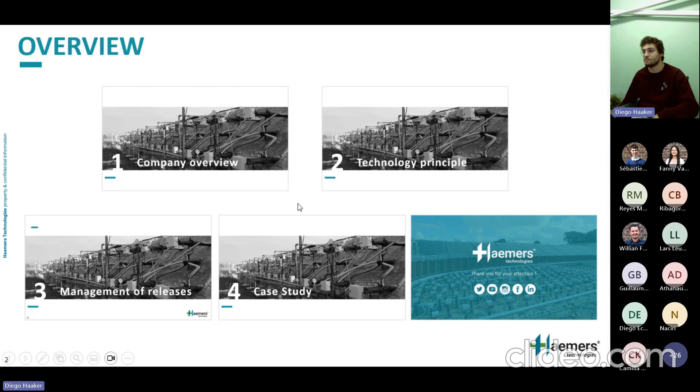So let's begin with the company overview. Who is Haemers Technologies? Haemers Technologies is a technology provider. We provide technology for soil depollution. We are based in Brussels, Belgium. We are approximately 40 people.

We have worldwide operations, and we have our own smart burners manufacturing facility. It's been 25 years that we've been in business. We also have our own lab and R&D facility. So to remind you, we are really a technology provider — that's the core of our business.

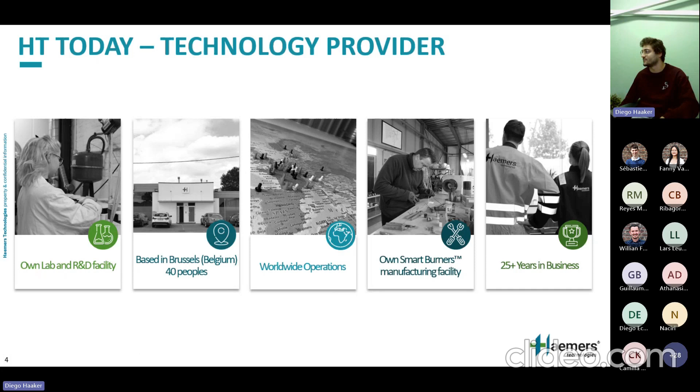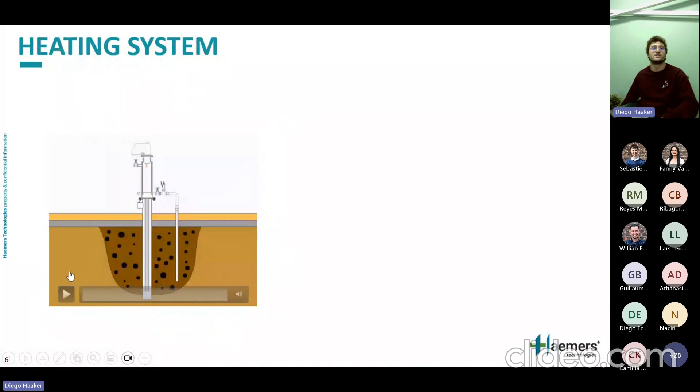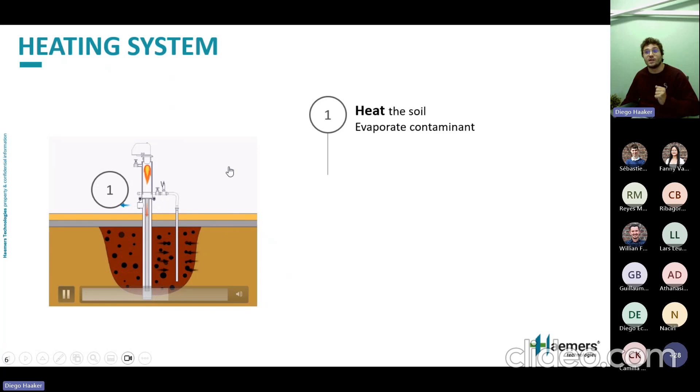Now let's take a look at the principle of our technology. We have a little animation here. Basically, what we do is heat the soil. Why do we heat the soil? We heat the soil to evaporate the contaminant, as you see here with the little dots. And why do we heat the soil to evaporate the contaminant? To recover all the pollutants. You see here that the pollutants are recovered by a tube, the vapor tube.

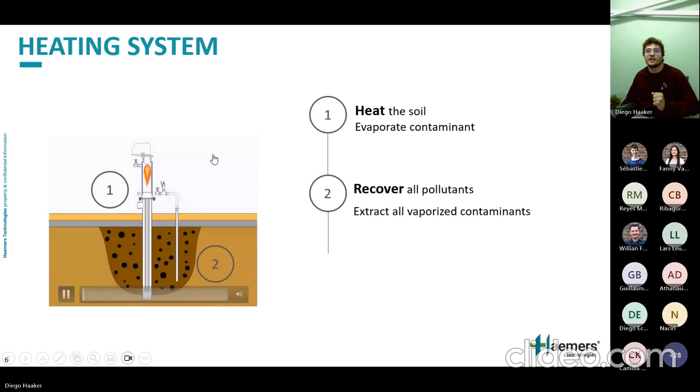And when the vapor is recovered, it is treated. In this example, the treatment method is the reburn. So the contaminant goes inside the burner, and we use it as fuel, so it's a clean procedure.

We also have another procedure to treat contaminants, which is the vapor treatment unit. It will be shown in the next slide.

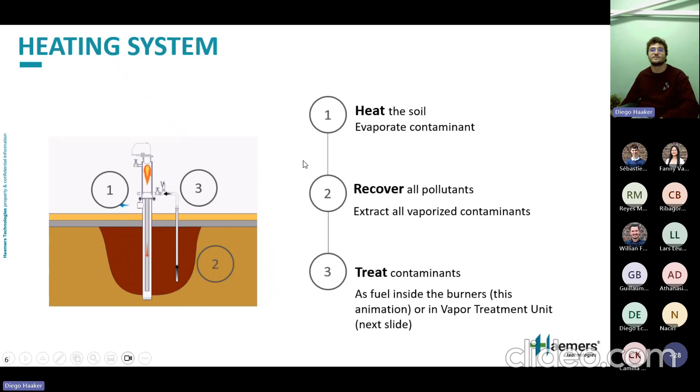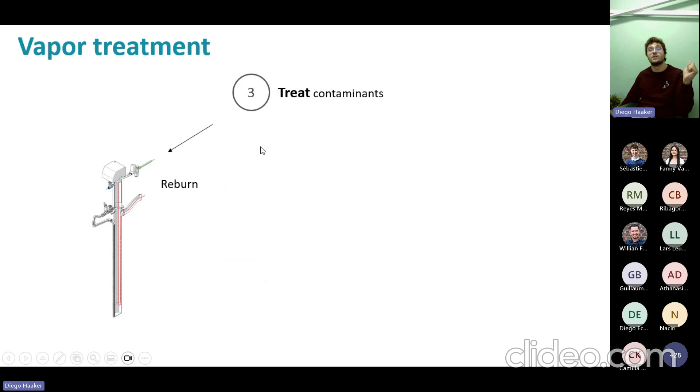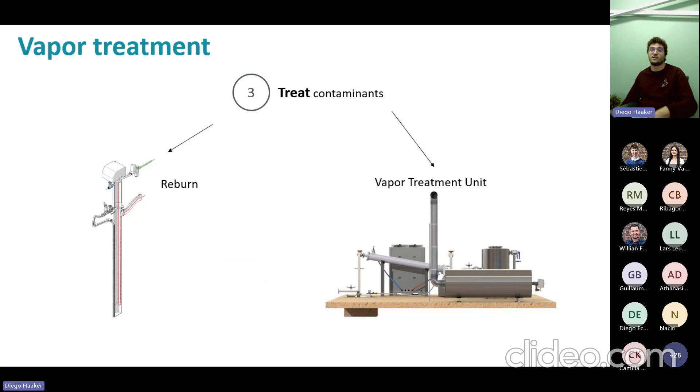As said, we have to treat contaminants, and we have two solutions. We have the reburn that was shown in the previous animation, where you have the vapor that goes inside the burner, or we have a vapor treatment unit. A vapor treatment unit is a lot of equipment whose purpose is to clean the vapor. I will show you more precisely that later.

So let's take a closer look at the reburn, because it's important to clarify these points to understand properly the heart of my presentation after. So you have the vapor that is re-injected into the burner. You see the vapor tube just beside what we call the heating tube, and these vapors go inside the burner. Then what we call the combustion gas goes into what we call the combustion network.

So combustion products are sent up to the chimney and directly destroy contaminants. What's interesting with the reburn methodology is that it reduces fuel consumption and it has a zero waste profile, circularity.

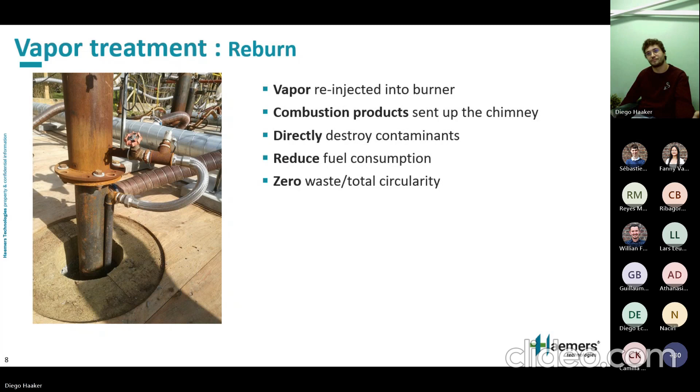About the vapor treatment unit, it's another scheme. It will again be more detailed after. So just another look at what it can look like for the vapor treatment unit - big equipment, and we will clarify this again later.

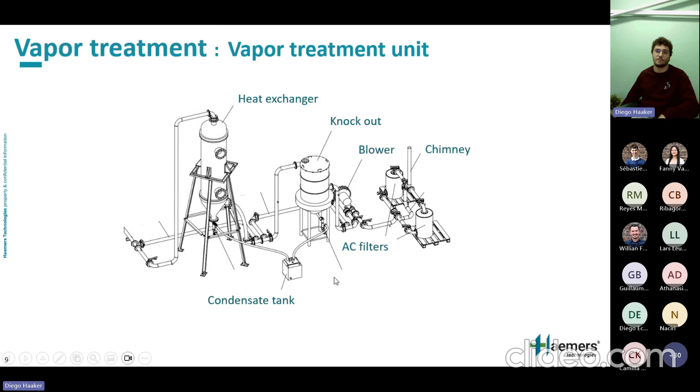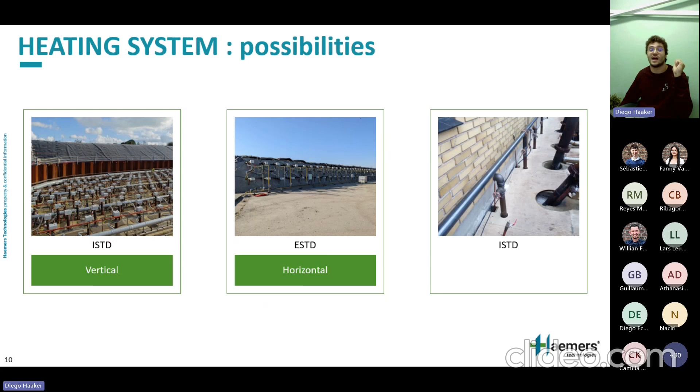So we talked a bit about how we treat the contaminants, and now we will see the different possibilities of implementation of our technology. So we have what we call ISTD, in situ thermal destruction, which is vertical. Then we have ESTD, so we build a pile with contaminated soil and insert the burner horizontally. And finally it's again ISTD, but then the tubes are inserted oblique. So here are the three possibilities.

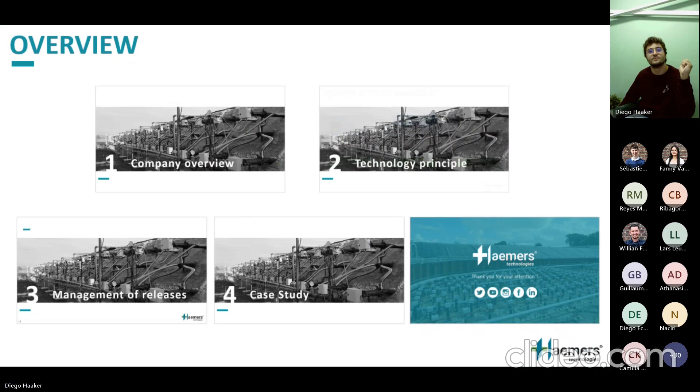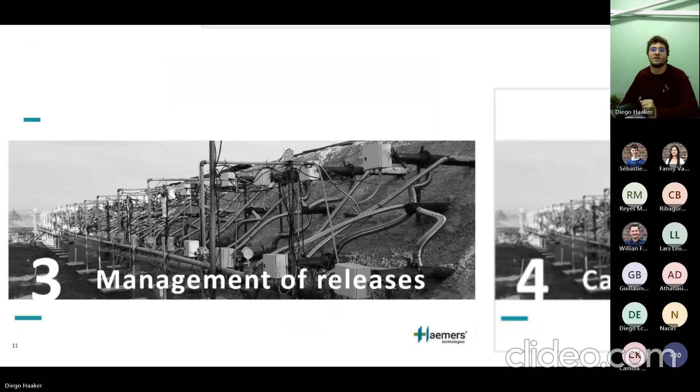So now we've seen a bit of the technology principle. We're going to go inside the heart of this presentation, so management of releases. Let's begin with a picture of one of the projects. It was in Gela with our partner Icaro and client Eni.

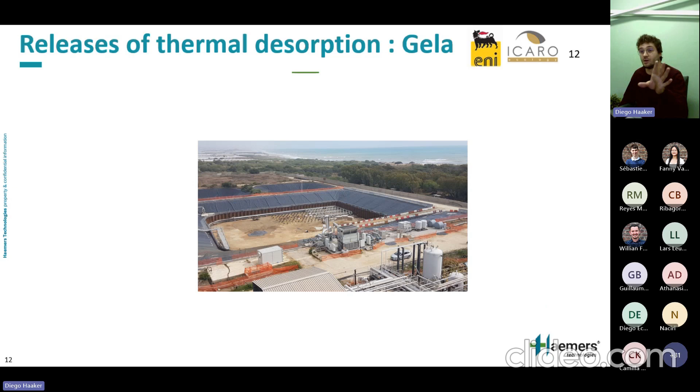And we will take some zoom at the locations where we have waste. So first, we are in the batch, and we have cuttings. Indeed, when you drill the soil, you will have an extra amount of soil to treat, and we have to recover it. So here on site, you can see operators that recover the soil and store them in big bags.

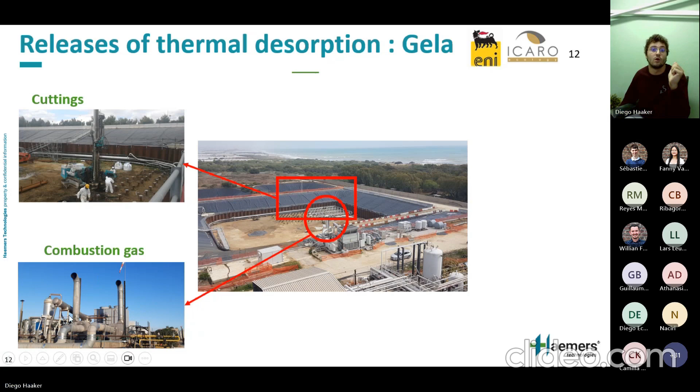Then you have combustion gas. Here, combustion gas are coming from the batch through the combustion gas network. And here you have the fan and the chimney where the gas can exit the process.

Then you have soil vapor emissions. So here is a picture of a vapor treatment unit - not exactly the same one that I showed you previously, but another one.

And finally, you have condensates. Condensates are the liquid recovered from vapor emission, but with the vapor treatment unit, you will cool them down, and so you will have liquid to manage. I will show you more precisely that after in this presentation.

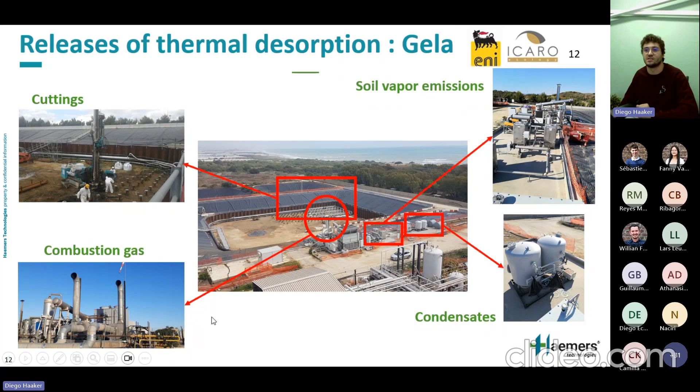We also have another view of these condensates. Here it was a project in Corsica. So you can see a condensate tank, circled with a red dot, and also a more precise scheme of that, just to show you how it looks.

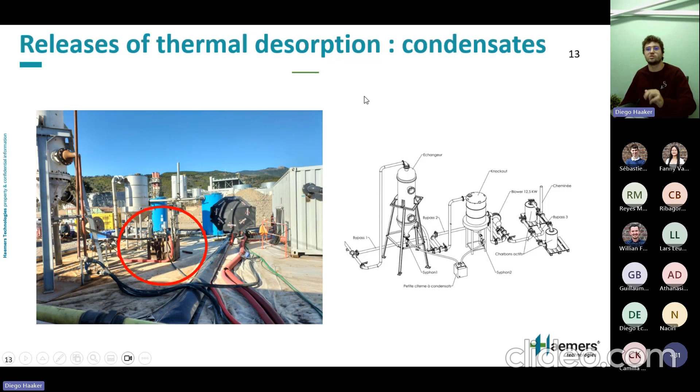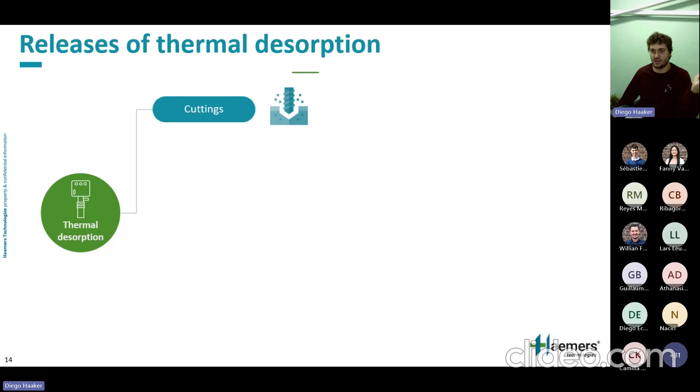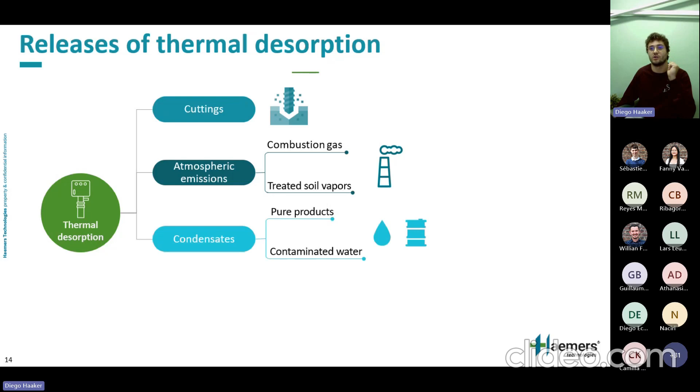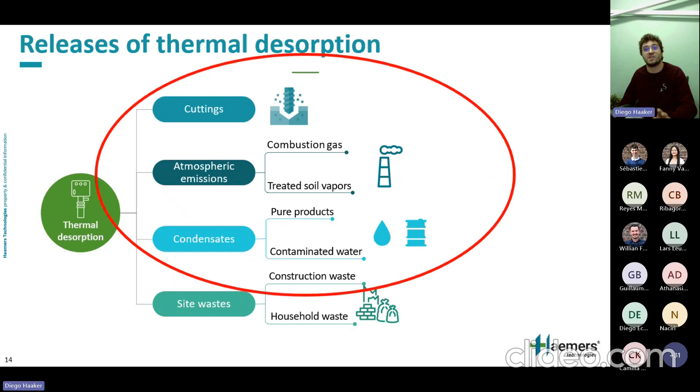So let's assess what I told you in the previous slide. What are the releases of thermal desorption? We have cuttings, atmospheric emissions with combustion gas and treated soil vapors, condensates with pure products and contaminated water, and site waste - construction waste like concrete, isolation, and household waste for everything that happened on the site. In this presentation, I will focus on cuttings, atmospheric emissions, and condensates.

So we've made the inventory of the releases, and now we want to see a bit which releases are associated with the methodology of treatment.

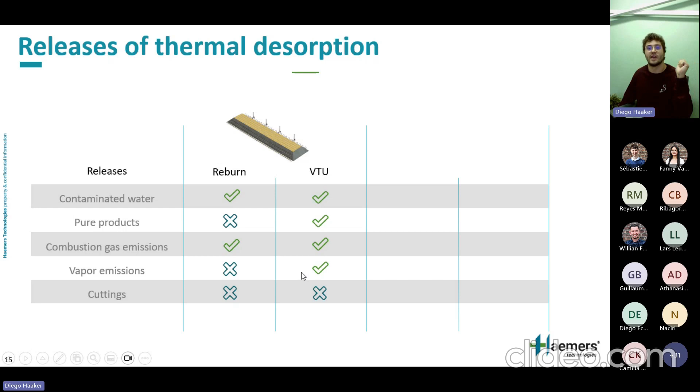So for the reburn in an ESTD pile - so reburn again, it's the solution where the vapor is directly sent inside the burner, so recycled - we have for releases contaminated water and combustion gas emissions. If we use a vapor treatment unit, we have contaminated water, pure products, combustion gas emissions, and vapor emissions. No cutting.

If we are in an ESTD batch, and we are in reburn, it's the same as ESTD pile, but this time we have cuttings because we have to drill the soil. And if we have a vapor treatment unit, we have all the possible releases in thermal desorption.

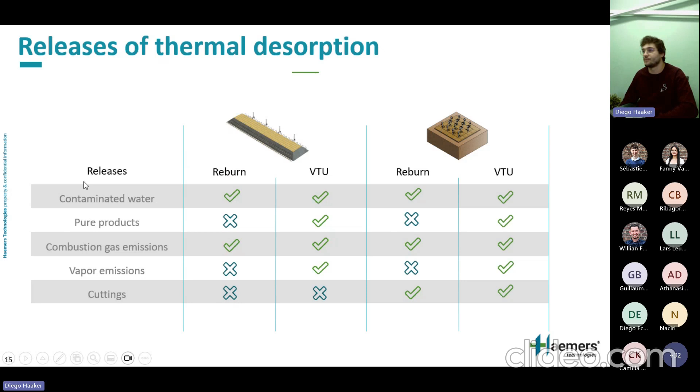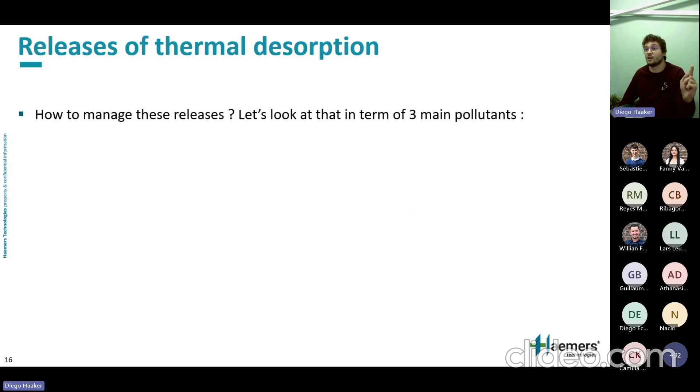So we've seen the inventory of releases and how it is associated with the methodology we want to choose for the depollution. We're going to see how we manage this regarding three main pollutants: mercury, fluorinated hydrocarbons, and mineral oils.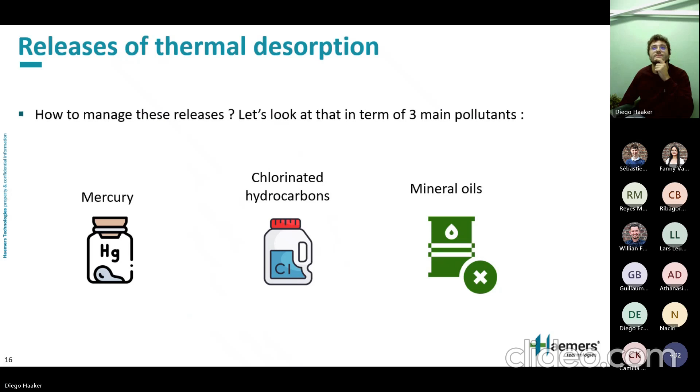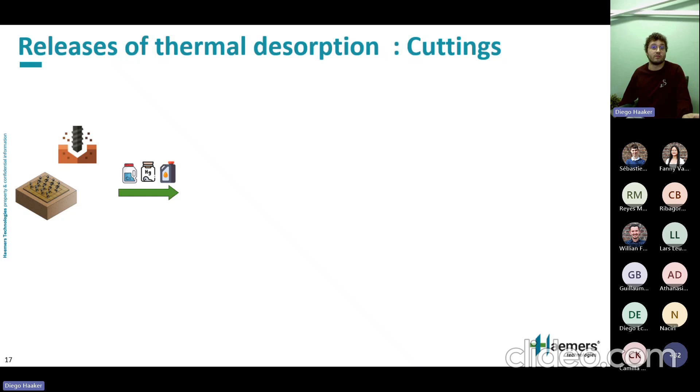So for cuttings, you have cuttings to manage because you drill the soil. How are you going to manage this? Cuttings are relevant for chlorinated hydrocarbons, mercury, and mineral oils. You will have the same methodology. The only thing that changes is that if you are treating mercury or chlorinated compounds, the PPE, the protective equipment, will be different, and maybe some procedures to do it safely, but it's the same principle.

So I took again the picture I showed you previously, where you can see operators recovering cuttings from the drill, from the borehole, and storing them in big bags. So we are at this stage.

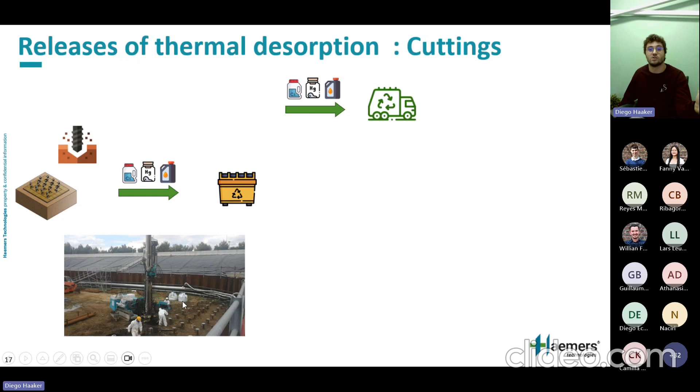Then you have three solutions. First solution, and the easiest one, you call an external company to send these soils to a treatment facility. Second solution, you can have a small container dedicated only to treating this extra amount of soil. That's something Haemers can provide as a solution.

These containers are equipped with a vapor treatment unit and can also work in reburn. What's interesting here is that it can manage the pollution directly on site.

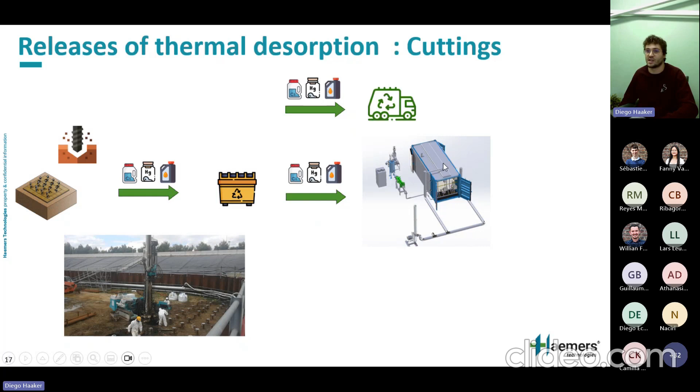Finally, the last solution is to pour the extra amount of soil and add a new layer of soil, then you can treat it. So you will elevate the soil level a bit. That's a solution. It's not always feasible on site, but it's good to know that it exists.

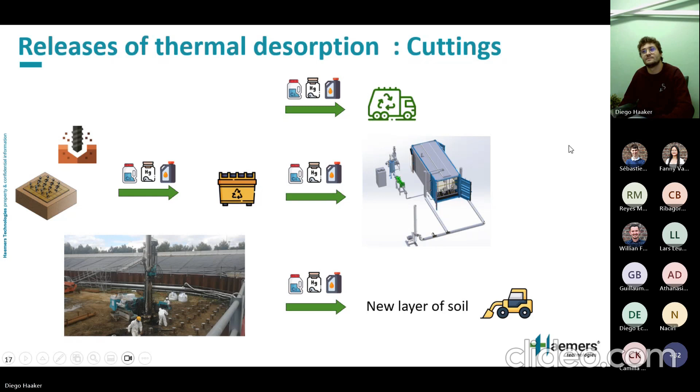Then you have soil vapor emissions to manage. We've seen cuttings, now we move to another category. Let me take the laser pointer. So vapor emissions, how it works, how we manage it.

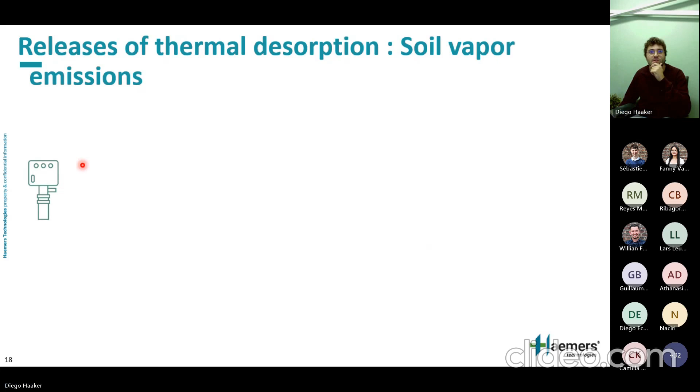Doesn't work as I was expecting. Go back. Okay, no laser, sorry.

So first solution, you are in reburn, which means you have low to mid hydrocarbon pollution. Again, you have the small photo as a reminder. For these emissions, it's easy: you inject the hydrocarbon vapor inside the burner, and it can be released through the chimney.

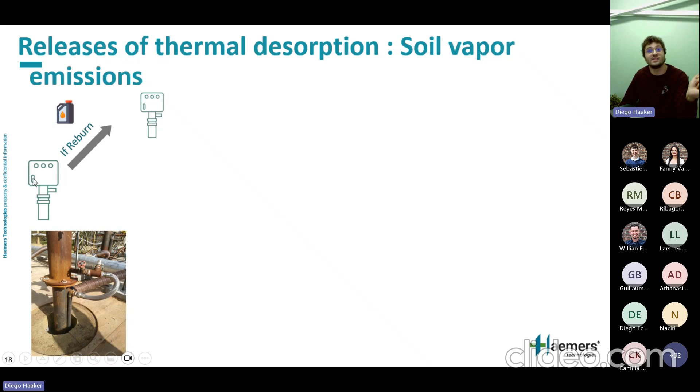First thing you want to do with the vapor treatment unit is to cool down the vapor. When you cool down the vapor, you will have an amount of condensate, and the condensate has to be recovered and goes to a condensate tank. So first thing: cooling.

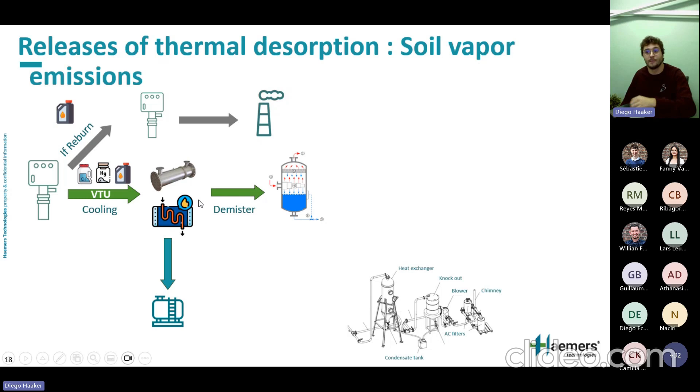Then, once you've cooled down your vapor, you have a lot of condensate, but you still have moisture in your vapor. You have droplets, moisture, and you want to remove it from the process. So we have what we call a demister, and the demister also produces a lot of condensate that you have to recover.

In this picture, I know it's a bit small, but you can see the knockout tank that has the demister inside, so it's the same thing: knockout demister. You can see that the condensate goes to a condensate tank, and that's the principle of the scheme you can see here.

Once that's done, you have two solutions. The first solution, which concerns chlorinated hydrocarbons and mercury, is that it goes to activated carbon treatment. So the vapor goes to activated carbon filters to be purified, and then it can be sent to the chimney.

Second solution for mineral oils: they go to what we call a thermal oxidizer. A thermal oxidizer is basically a big burner where you burn all the pollutants so that it becomes combustion gas products. But sometimes these combustion gas products are still too toxic to the environment, so we have what we call a catalyzer. A catalyzer is something you have on your car — it can convert toxic compounds into more friendly ones, and then it can be released to the atmosphere.

So that's a general principle of soil vapor emission management in the operating way. You are at the end of the process, at the chimney, and then you have norms to respect. This norm varies from place to place, and even in the same country you can have different norms.

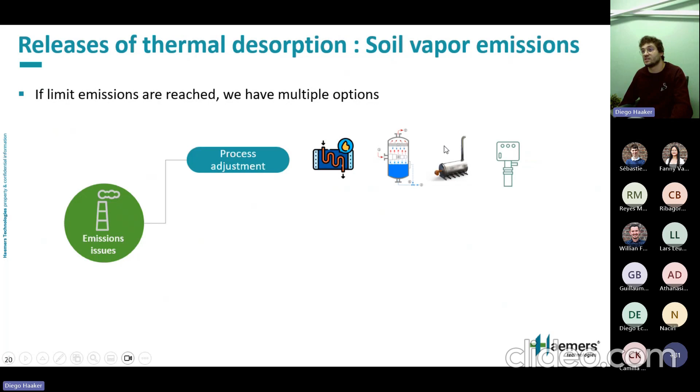So you have emission issues. The first thing you want to do is adjust the process — look at your heat exchanger, your demister, your thermal oxidizer, your burners, and see if something is wrong. If everything is running properly, the second solution is to change the activated carbon. Why is it the second solution? Because activated carbon is the expensive consumable on the project, and you want to conserve it as much as possible. That's also why in the process we cool down the soil vapor as much as possible and remove the droplets — to conserve the activated carbon because it's expensive.

The final solution, not an operating measure but more an emergency measure, is to adjust the heat of your burner. Normally, if the soil has been correctly characterized, you don't have to do this. It's only if we have something unexpected in the soil, a highly concentrated product that wasn't managed during the early stage of the process. So that's the last solution, but normally if everything has been correctly communicated, we size it properly at Haemers Technologies.

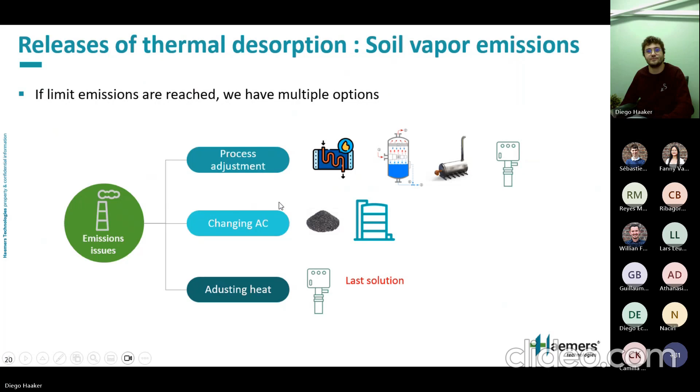So we've seen soil vapor emissions. Let's continue with condensates — here's a little reminder. Let me take a closer look at this point. You can see the little reminder on the screen with the tank. We are at this stage of the process.

I will say it again if it works. Doesn't work — not too bad. Come on.

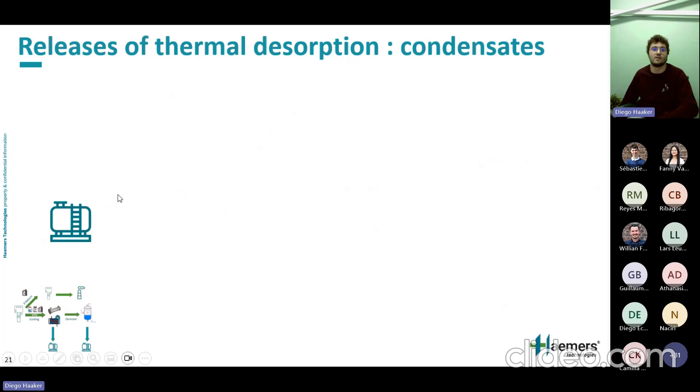So we have your condensate tank. What do you want to do? You want to separate the product from water, and to do that you will have separators. Separators work a bit differently depending on the products. Let's take a look first at mineral oil. For mineral oil, you will separate the oil from the water because oil is lighter than water, so it will go to an upper layer. Then this oil is sent to a separate tank, and the basic way to manage this is to send it to a treatment facility.

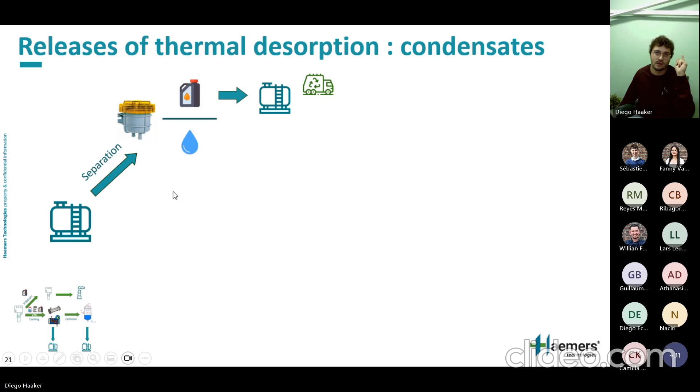Then you have your water. What can you do with your water? You can send it directly to the sewer or to activated carbon for treatment, depending on the concentration and the legislation where you are. So the solution is directly to the sewer, or go through activated carbon for treatment and then send it to the sewer.

For chlorinated compounds, it's the same logic, except that chlorinated compounds are heavier than water, so they will be at the bottom of your tank, and you do a separation also. The chlorinated compounds go to another tank and are recovered to be sent to a treatment facility. And the water, same logic, directly to the sewer or to activated carbon for treatment.

Final example, mercury. Mercury is a special case because it's way more heavier than water, about 13 times heavier, so you can't pump it to another tank easily. The solution is that the mercury stays in the same tank as the one you recover it in first, while the water in the upper layer of the tank is sent to activated carbon for treatment. In this case, there is no universe where you can send it directly to the sewer; it has to go to activated carbon for treatment.

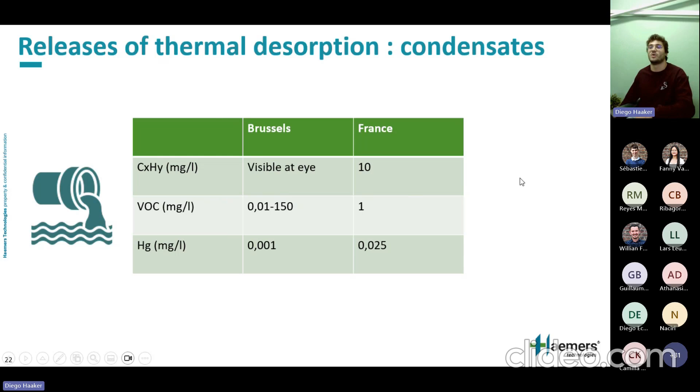Like for Brussels, mineral oils, the problem is if it's visible to the eyes, like you have a puddle of oil on your water. For the rest, you can see VOC goes from 0.01 to 150, depending on the nature of your VOC, because VOC is a large category of compounds. You can also see a difference for mercury in France and Brussels, where Brussels is way less tolerated than France. I don't know if this was very clear, but I hope everyone understands me.

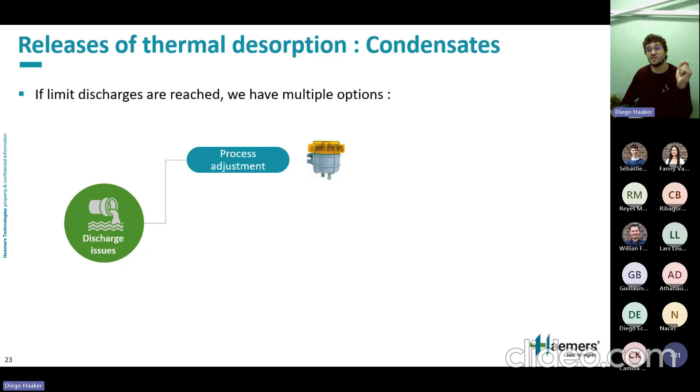Again, if limit discharges are reached, we have multiple options for discharge issues. First thing you want to do is adjust the process, so you go to the separator and see if everything is running well. Then if everything is running well, you change the activated carbon. And if you still have a problem, which means we're in the same situation as for soil vapor emissions, that we have an unexpected pollutant or the soil was badly characterized, you have to adjust the heat as a last solution.

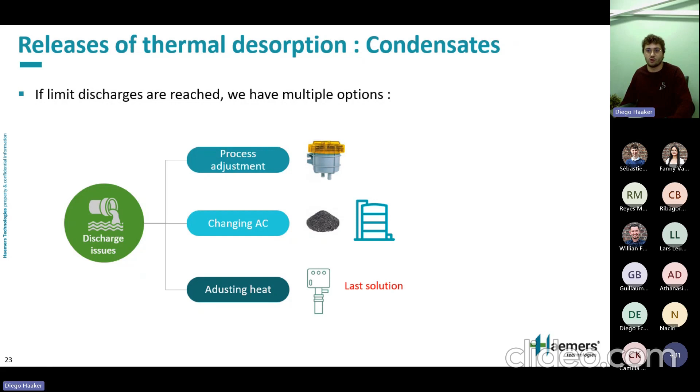Let's take a look at a small case study. This case study is about a project in France, where we have a mineral oil pollution of approximately 5,000 milligrams per kilogram of dry soil, with a volume of 2,000 cubic meters. Our technical approach on this project is ex-situ thermal desorption reburn.

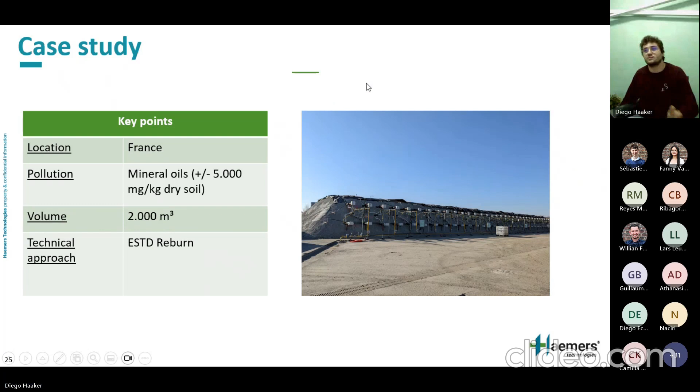That's the project, but why this project is interesting is because we have strict emissions control on these projects, and we have to do continuous measurements. How can we manage continuous measurements? We will have what we call a sampling device, like what Haemers calls a sampling device. So what's a sampling device? It's basically a lot of monitoring devices connected to a computer.

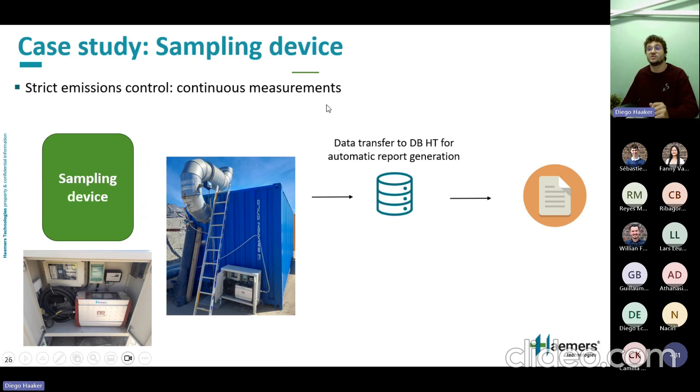So you have how it looks on site. And what does this computer do? First action, it transfers the data to Haemers Technologies Dropbox for automatic report generation. These reports are then sent to the client. Second action, it sends an alarm to the operator on site on his mobile phone for burner regulation. So the operator receives an alarm and knows at this moment that he has to go on site to the burners to see if he has a faulty burner or a problem.

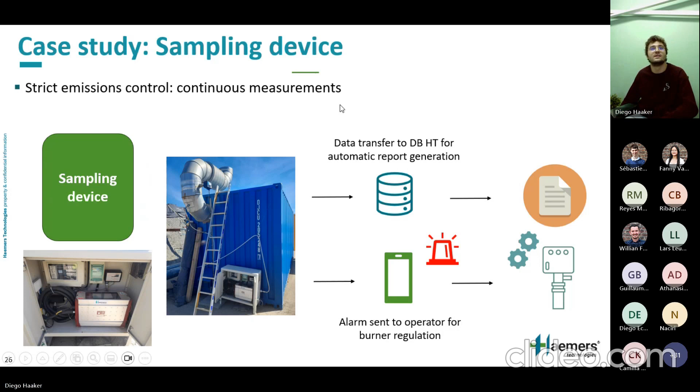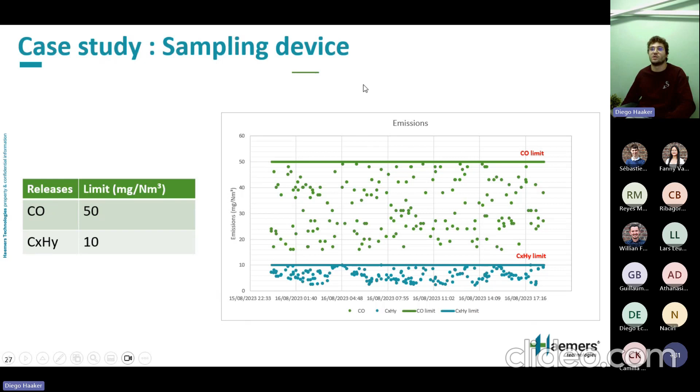We are at the end of this presentation. Thank you everyone for listening, and I'm waiting for the questions now.

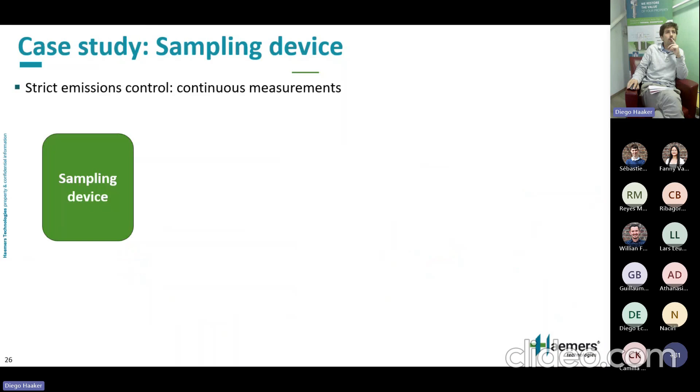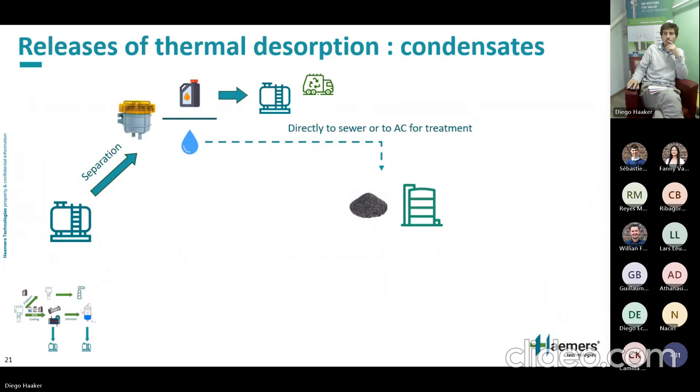Here, maybe I think it will be interesting because we are understanding the logic, the rationale behind it, but basically we do not have any numbers when we are discussing. Could you highlight and explain how often we have to change activated carbon when working with a VTU? What are the main parameters that design the different changes? Can you give me more detailed information?

Yes, so I will focus on the activated carbon filter on this one. For activated carbon, it depends. The design will depend on the pollutant you have to remove from the soil. Let me think about how to explain it in a basic way.

Activated carbon is designed to recover the pollutants once we assess that they've been cooled down and condensed as much as possible. The pollutant has a capacity to condense at a maximum temperature. You'll have an excess of this pollutant in your process, and the activated carbon is designed to capture this fraction. For the sizing, generally we don't want to change it that often, so like every 2 or 3 weeks, depending on the site conditions, and generally we work with an external company to do that.

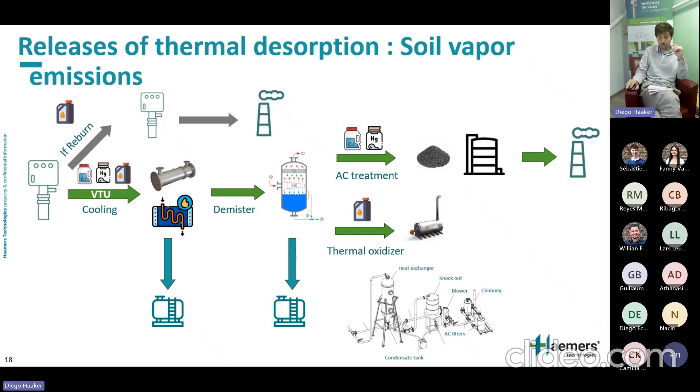Another question was on the next slide, so it won't take long to get there. Here, of course we work internationally, and the regulations really depend on the country. If you just look at Belgium, it's different whether you're in the French part, the Flemish part, or the Brussels part.

My question is more specifically about the choice of the vapor treatment unit. A vapor treatment unit is really expensive, and it's complicated to meet the standards. For CO, CO2, and water, it's quite straightforward to reach compliance. But when we're talking about corrosive compounds, we cannot use a reburn. Yet it's a pity to install a very expensive vapor treatment unit. So the question is: can we imagine an example where we have hydrocarbon contamination with a really low, residual concentration of chlorinated compounds - would it be an issue to use a reburn in this case?

In this case, for chlorinated compounds, depending on the amount in the soil, you could just ignore it for the process, because you can release chlorinated carbon at the chimney, and if the concentration is very low, there's no issue for the regulations.